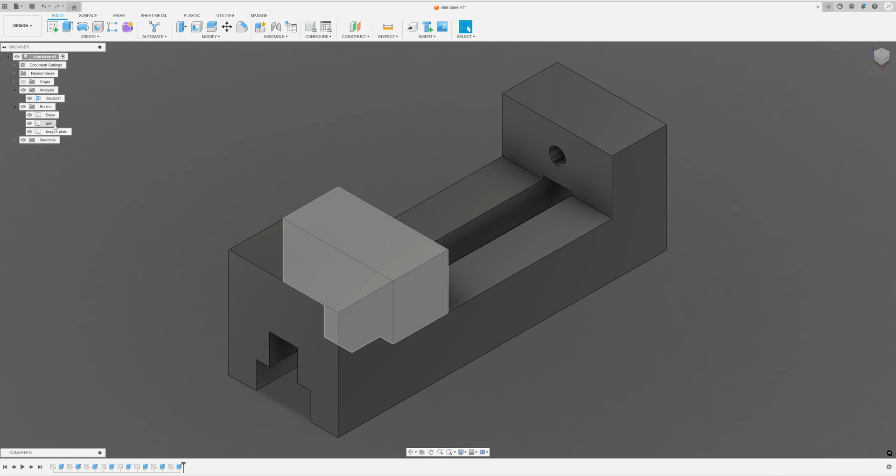So we've got our base, our jaw, and our keeper plate at the bottom. So now what we have left is a second keeper plate on the face here, the rod, which will be threaded, Acme threaded, and a knob. Hopefully we can get that all done in this video.

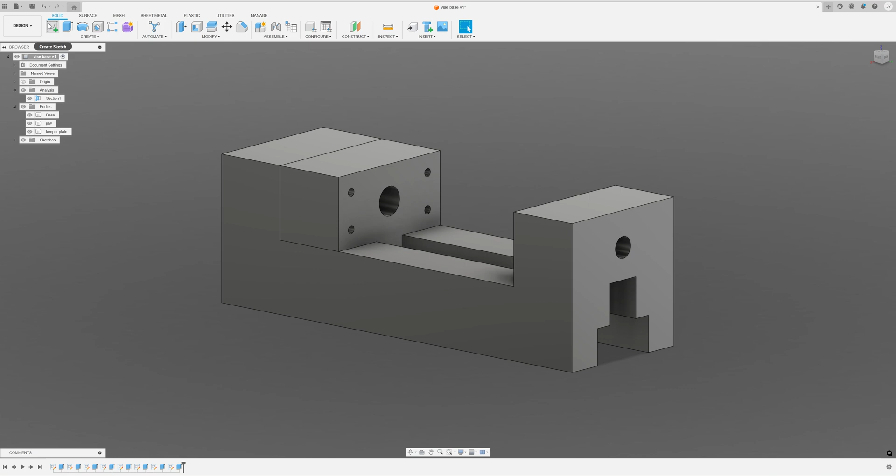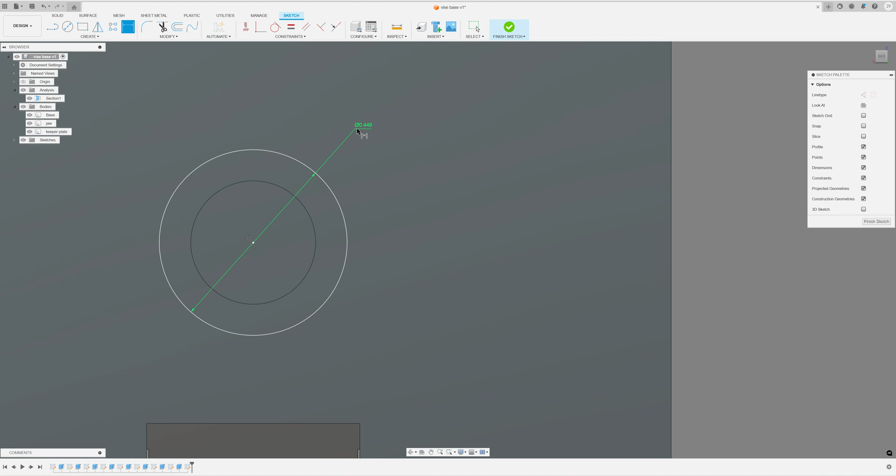So let's start with the rod itself, which will go in there. This will be definitely the easiest part. We're just going to create a sketch right here. Wait for that circle to appear, which means we're concentric. Draw our circle, and it will be 3/8 because we'll be using 3/8 12 Acme thread. So I'm just 0.375. Whoops, accidentally hit enter too soon. 0.375. So that will be our Acme thread.

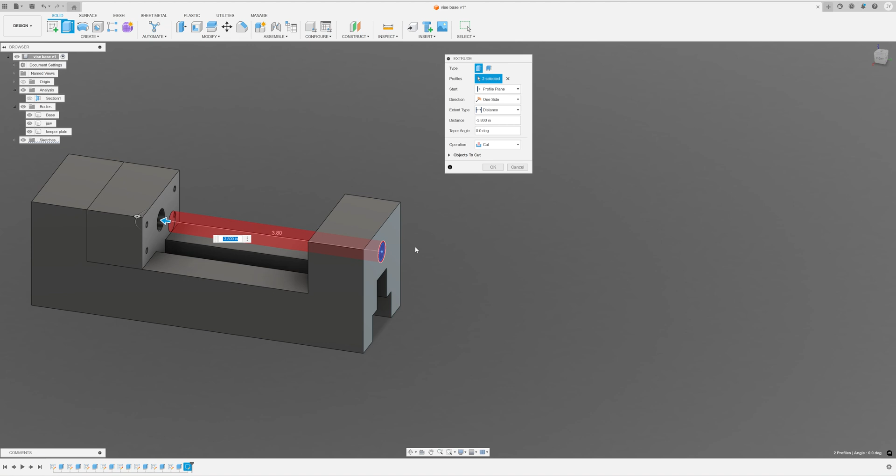E to extrude, select both circles. And we'll start extruding this way. We don't want the sectional analysis on because that's going to get in the way right there. And as we can see, we're taking a cut this direction, but that's not exactly what we want because this is a rod. So we're going to do two sides. Extend this out. We'll extend that out 2 inches. New body, because this will be a new body.

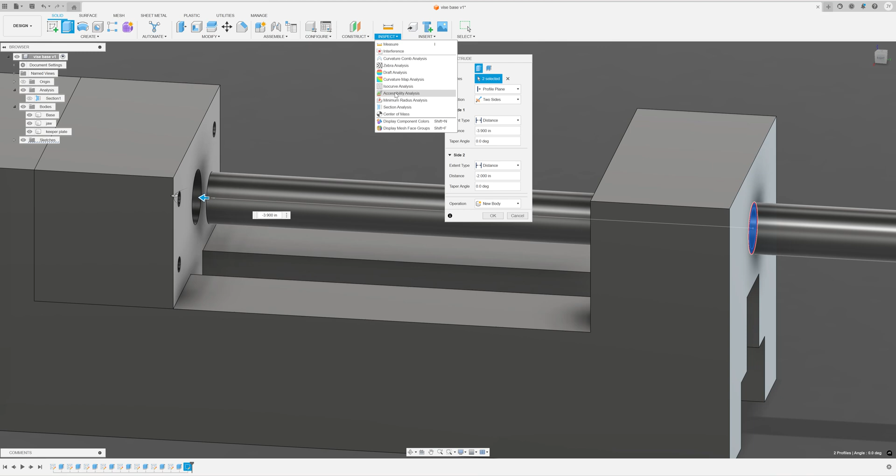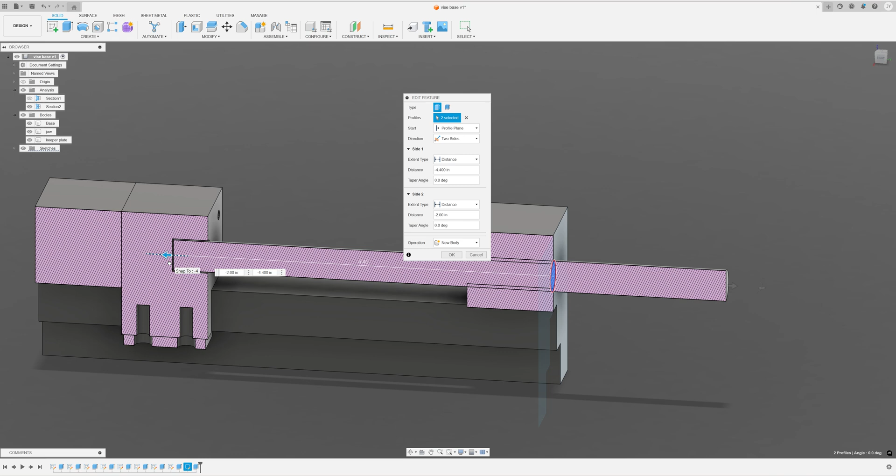And to figure out how far in this way we're extending, it's kind of hard to see. So what we will do is make another sectional analysis. Back up to inspect, drop down, sectional analysis. I'm going to click this face here, move it to 1 inch, which is halfway through. Almost 1 inch, right there, 1 inch. All right, so this, I'm going to edit feature so I can continue dragging this. I don't want to bottom it out because that might cause binding later on.

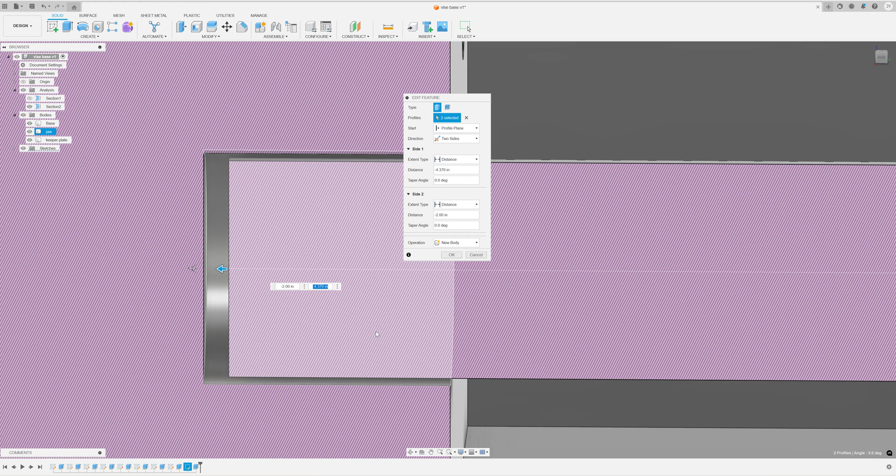Actually, that looks pretty good for clearance wise. But I'm going to bring it back just a little bit. So for this, we're going to go to negative 4.375. Negative 4.375. All right, so that's where we want to be. As we can see, it's going to come out the other side. This is a new body, so we see 2 lines.

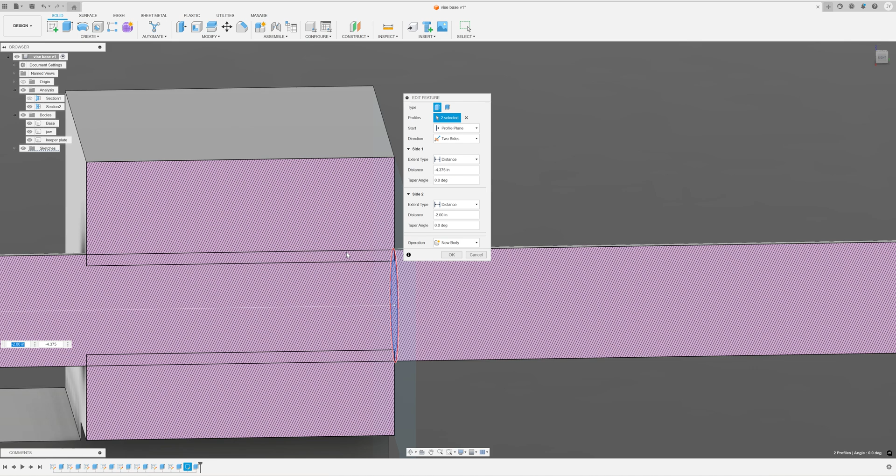The reason they are intersecting each other is because this is going to be threaded. This rod is going to be threaded on the outer diameter, and the hole will be threaded on the inner diameter. This is actually where our thread engagement will be. This can be modeled, but it just takes extra time and effort that really for the drafting process isn't necessary, especially if you're going to be the one machining it. So I'm not going to do anything about that. So that all looks good. Hit OK. That is what we want for that.

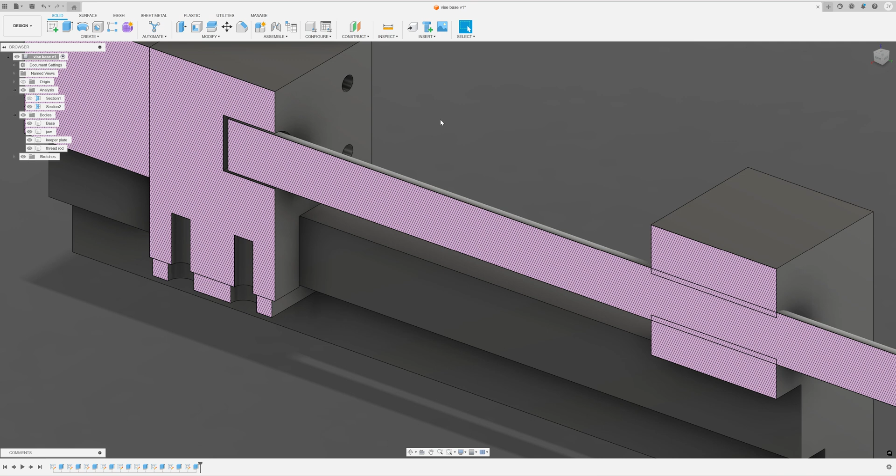So that will be thread rod. Name that so we can keep track of it. And we are done with that. So I'm going to turn my analysis off. This rod isn't completely done. We are going to have a notch in it. So looking at this now, again, I'm just kind of making this up as I go along. I will take a ring out of that section.

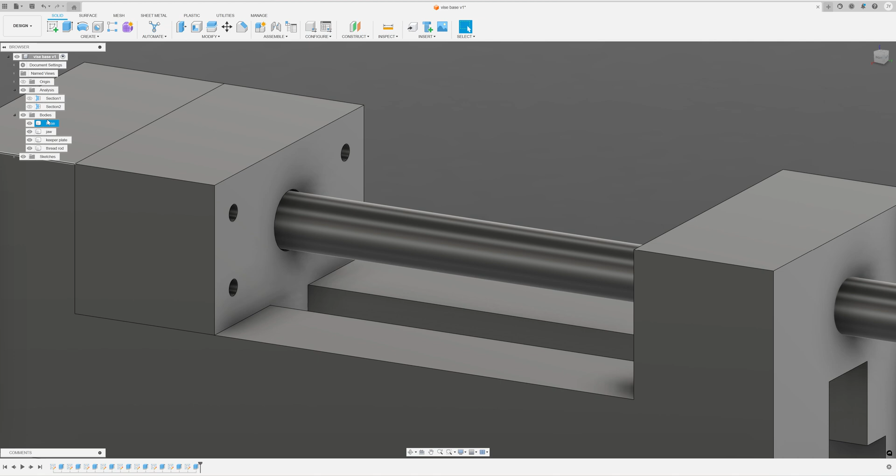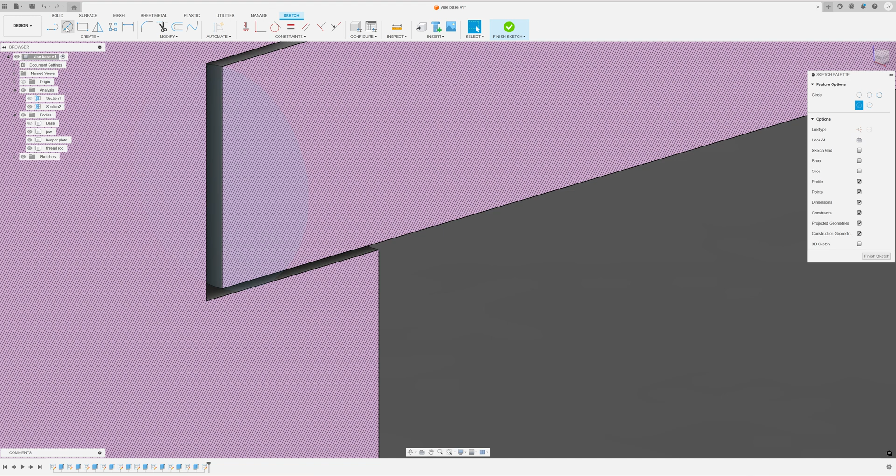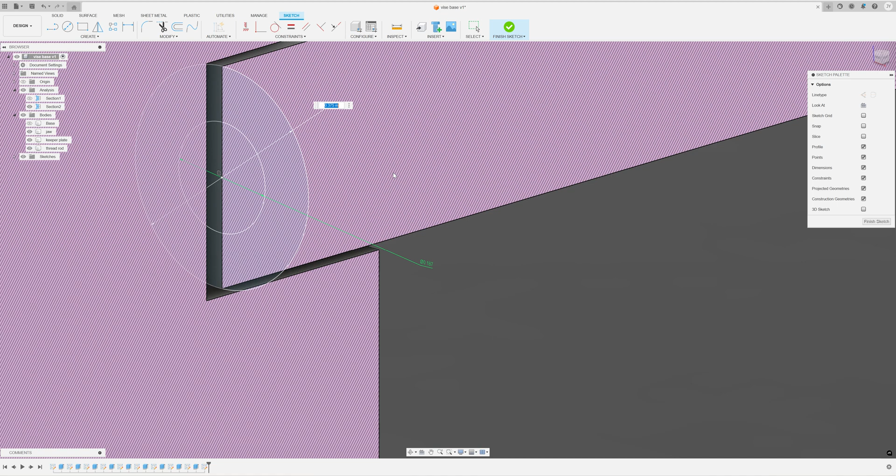So what I will do is turn off our base, which is this one right here, and turn on this sectional analysis so I can kind of see what's going on a little bit better. I am going to do another sketch on this face. It's going to pull me way out of line. So, circle, circle. This will be 0.187. And a second circle formed at 3/8 diameter, 0.375. So I want to make a cut, a groove in this rod.

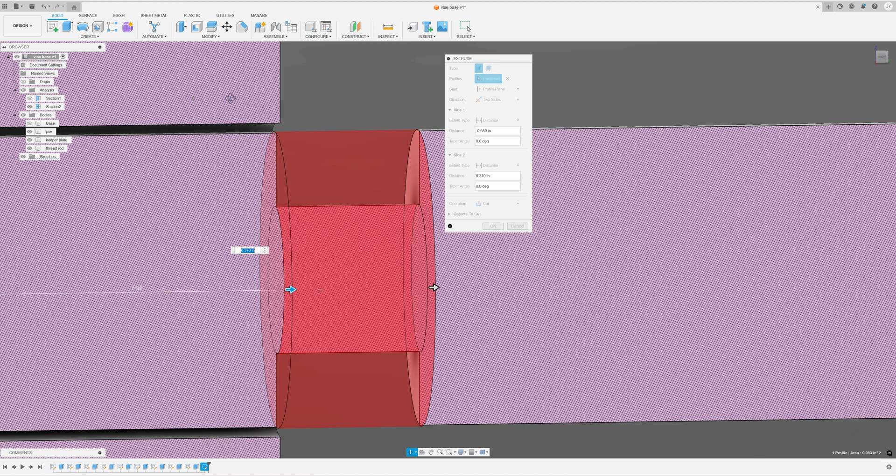There's various ways to do this. This is kind of the quick and dirty way. It works though. So I'm going to hit E to extrude, select that face, pull it back, and I'm going to do two sides. Pull this face up till it's just under that face. So 3/8 would bring me up to that face, so 375. I'm at 370 right now. I'm going to give myself, actually 5 thousandths clearance is pretty good. But I will give myself, actually no, I'm going to stay with 5. 5 is good. All right, so that's 375.

So I'm doing two distances. So the first one's 375. I want this groove to be 135 thousandths wide. So the first one is 375. 135 plus 375 will be negative 3, 4, 5, 505. 375, or 370 plus 1.

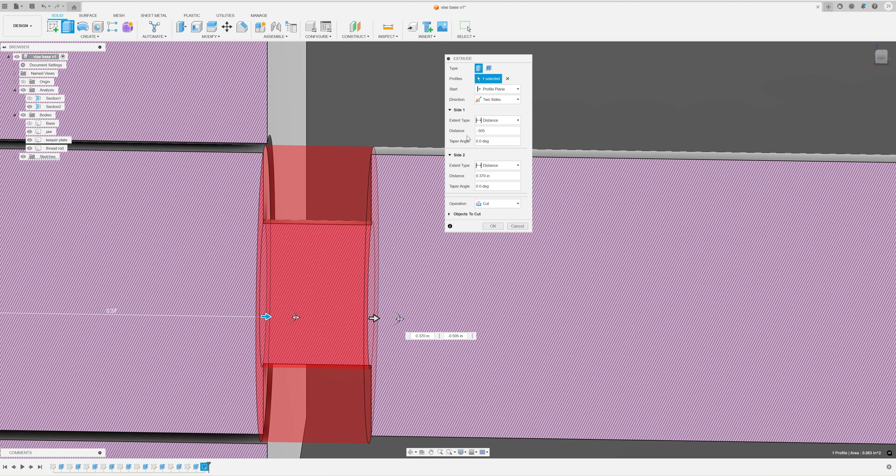Yeah, doing math in my head. Sometimes it's fast, sometimes it's slow. So, yeah, 135, correct. All right, or at least I think so. That will put a ring around this rod in the groove where we want it. So, cut, that's what we want. Okay.

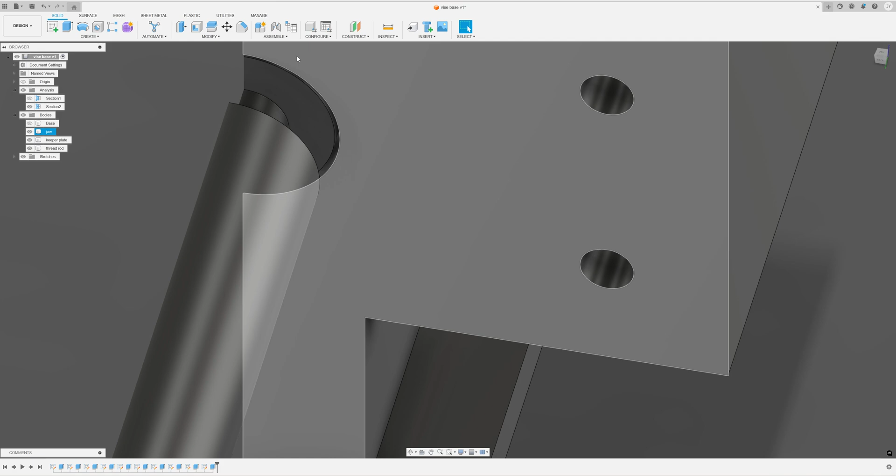So, this has created a groove in our rod, which we can then slide a plate over, which will allow this to then be pulled back when the rod is retracted. So we'll take this sectional analysis off. We can bring our base back, and I'm going to turn the first sectional analysis back on, but I'm going to move it. So what I'm going to do is edit. I want it forward enough now that I can see this reduced section.

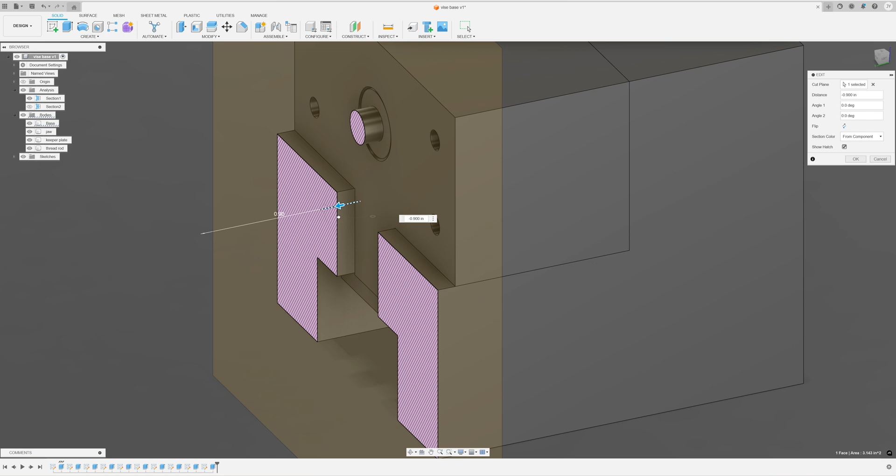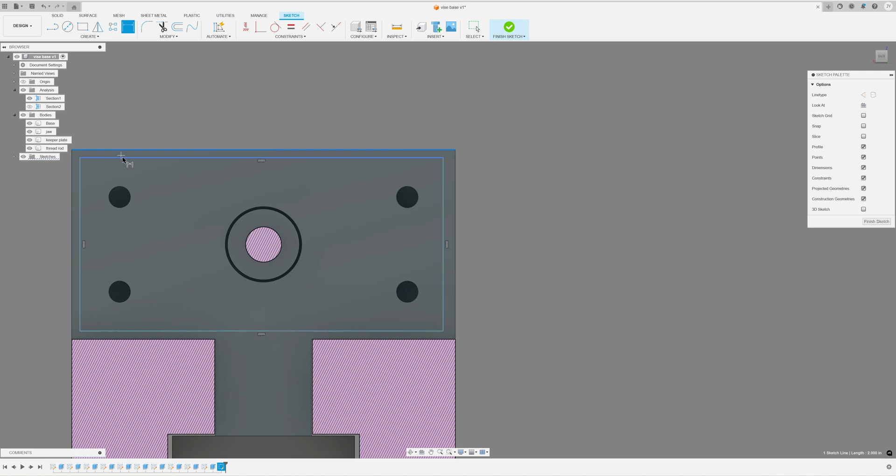All right, now the keeper plate. So we are going to do another sketch on this face. So for the keeper plate, we don't want it rubbing against the bottom of the vise, and we don't want it rubbing against this. So I'm going to start by a 2-point rectangle, and I'm going to draw it across, sketch dimension. I'm going to do 0.05. So give myself 50 thousandths of clearance along all the sides. So that's going to give me clearance.

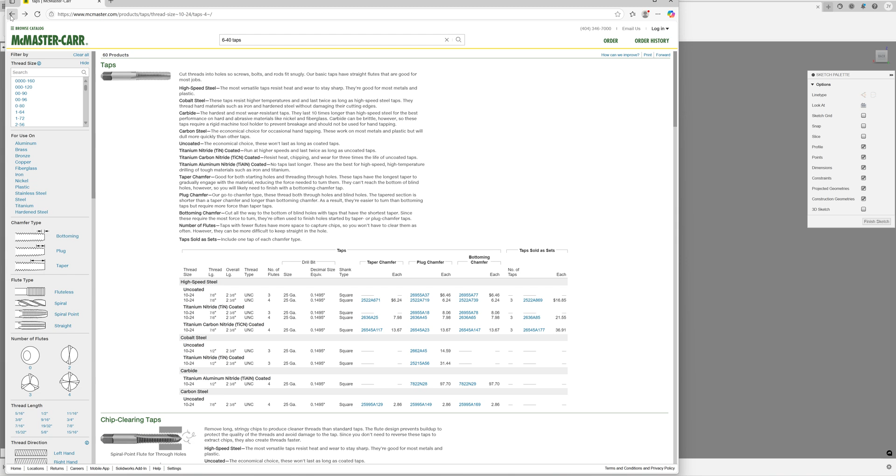Now for the holes, we were going with 6-40. So again, I'm hovering till that circle appears, clicking and dragging. And I'm going to then equals constraint, equal, equal, equal. So now they all equal each other. So I need to know what the clearance over a 6-40 bolt is. I can Google that, or I can just go back to where we were in McMaster.

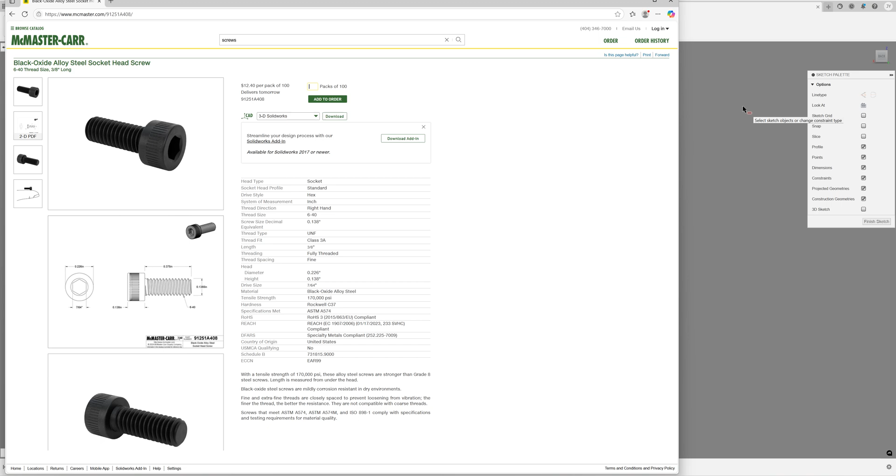6-40, socket head cap screws, and we're going to be going with the 3/8 fine. Product details. Screw size 0.138. So I want to give myself like 10 thousandths over that. 0.148. We'll call it 0.150. And now they're all sized.

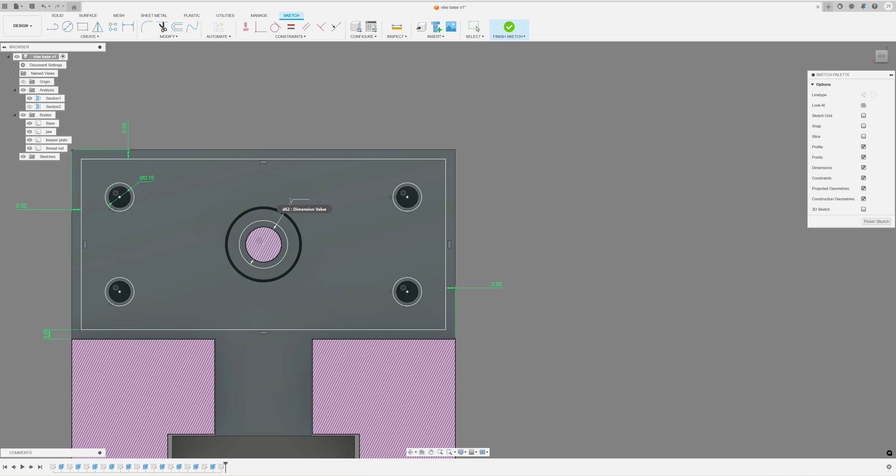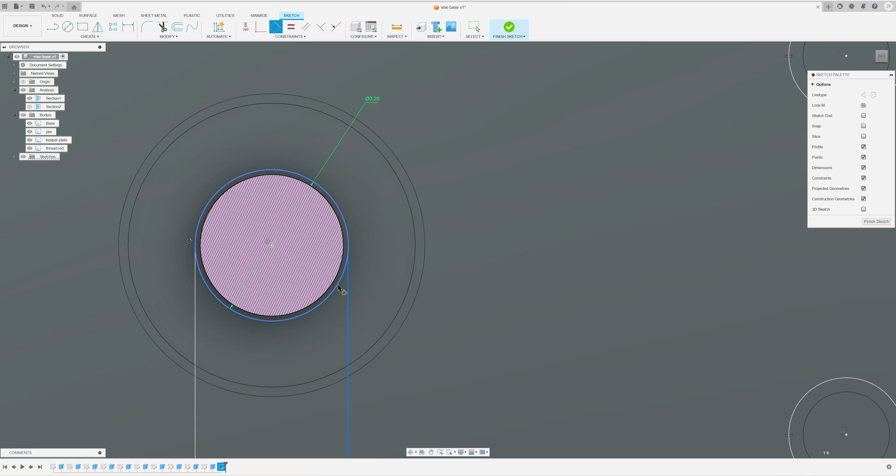Now I also need to make sure I have clearance over here. So for that, what I'm going to do is draw a circle centered on here. Dimension it to 200 thousandths, 0.2 for 200 thousandths. That's going to give me a 64th of clearance over the rod, which should be plenty if we do everything right. Now I'm going to draw two lines down, and then I'm going to make a tangency. So right now they're just kind of hanging there, so I'm going to make them tangent to the circle. And that turned them white. Also, they're square down here. So that is actually the drawing we need.

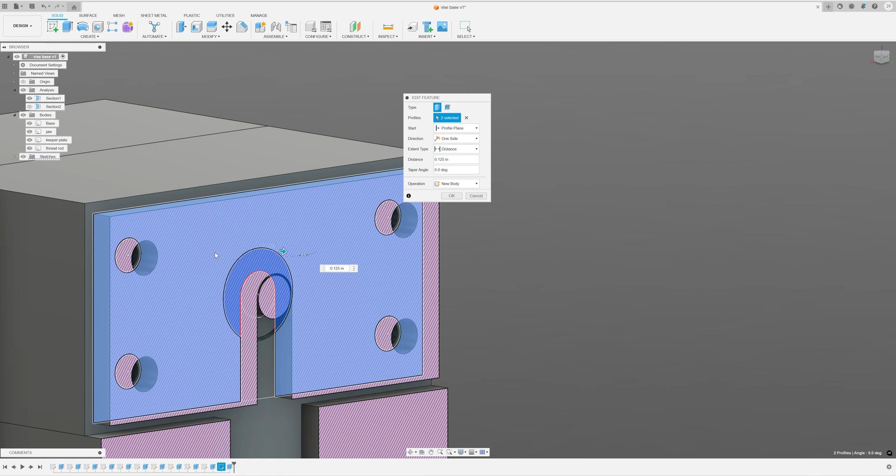Now we're going to hit extrude. Select that and select this. So by not selecting this channel here or that circle, I can now pull that out. We'll make this 0.125. And I always hit enter without thinking all the way through. Edit feature, 0.125. We don't want join. We want new body. So this new body will be our next plate. So we can turn our section off. Whoops, off. Why do I keep... Gosh darn it. There we go.

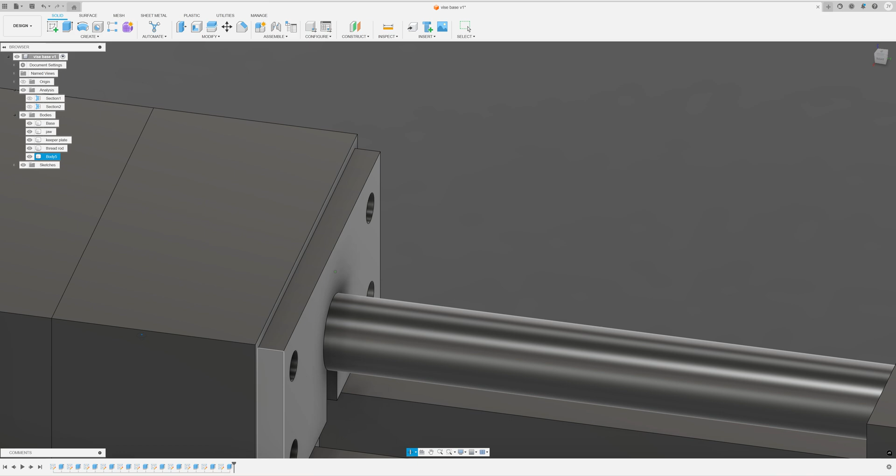So we have a little bit of clearance here, a little bit on the other end. This will also have a groove that fits over, so we can slide this plate in, bolt it in place, and now we will have a plate. When the rod is retracted, we'll pull the jaw back. So that will be jaw plate.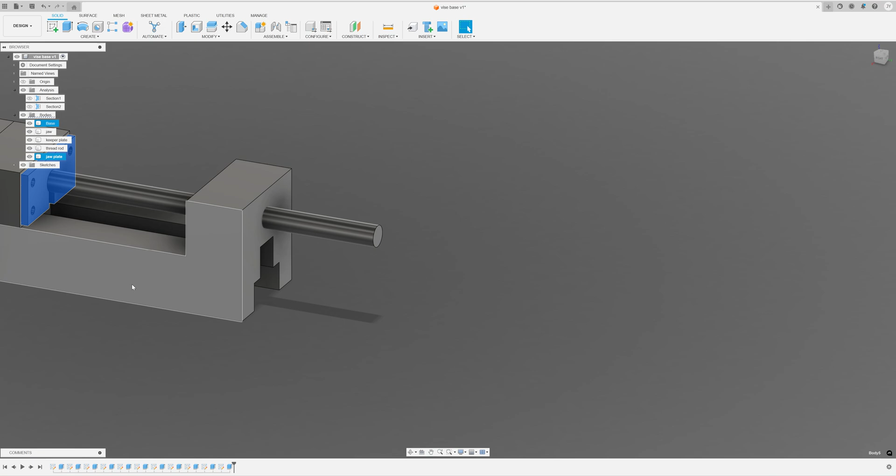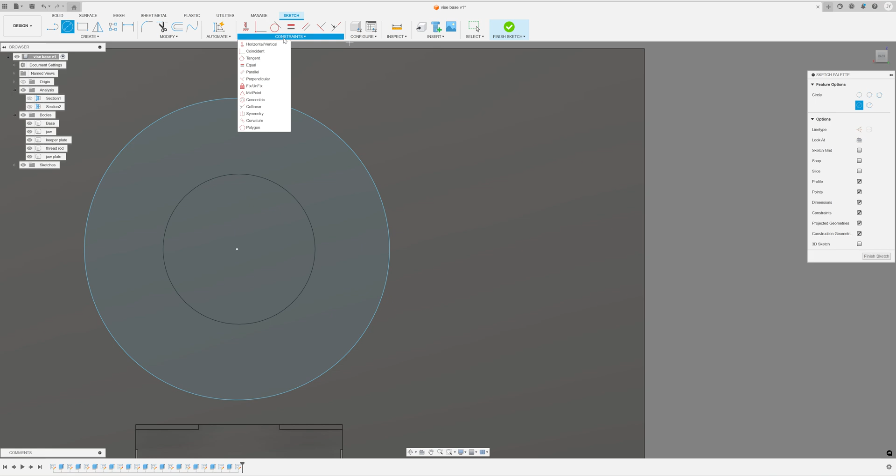All right, so last thing we need is a knob. For the end, create sketch. We'll select the end down here. Circle, because we're going to go with a circular knob. You can make a handle, you can make whatever. So for that time, I actually missed what the center of that circle was, so it didn't auto-constrain. We can always come back here, drop down, concentric, select that circle, select that circle. Now the two circles are concentric.

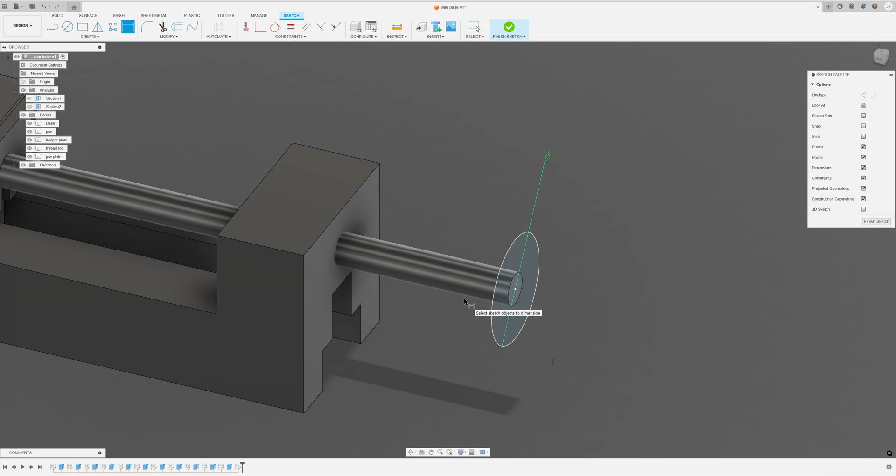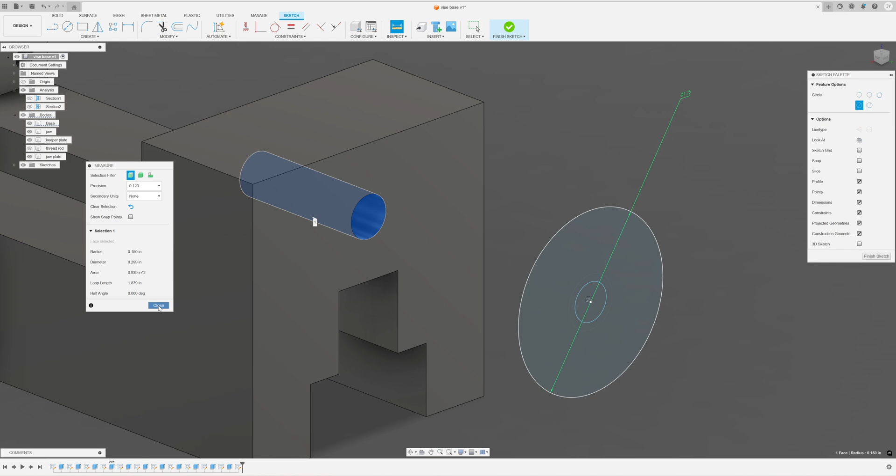Now for the size of the knob, come up, sketch dimension, and we'll go with 1.25, 1.25 knob, and we will bring it 2 inches back. So actually wait, sorry, almost got ahead of myself. We need to do a second circle to the correct thread diameter. So I'm going to make the threaded rod disappear. I can get my dimension here for what our tap drill size is, and I'm looking at a diameter of 0.299, which means when we bring our threaded rod back, I will dimension this at 0.299.

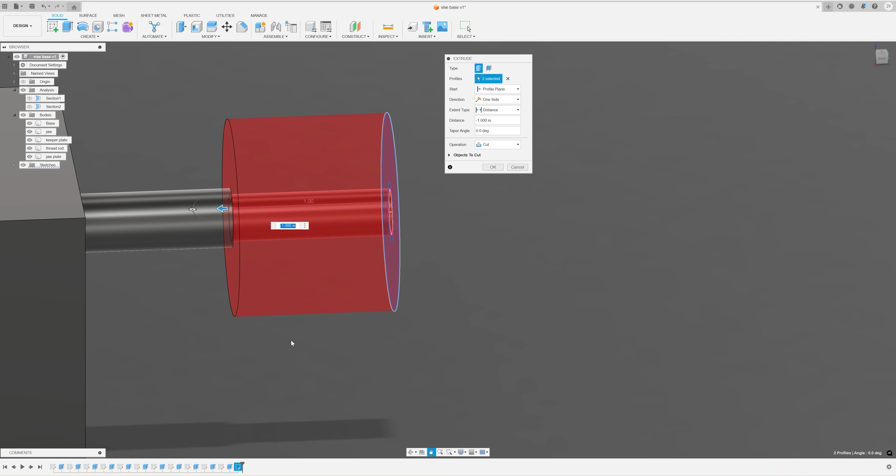Extrude by hitting E, select 2 rings, bring it back to 1 inch. So it's going to want to do a cut, but again, this is going to be a new body. It thinks it's intersecting itself, but we will thread that, so it doesn't matter. Boy, that rod looks a little long. We're going to adjust that.

Yeah. First time I've been accused of my rod being long.

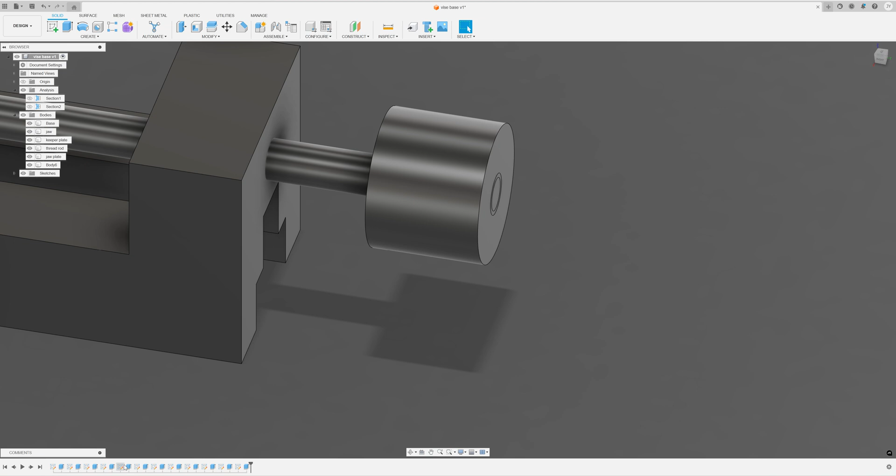All right. New body. Okay. So what I am going to do, though, is page back through this work, and I can find where the extrude for that rod came from. Or I can click it, and it'll highlight it. So it's right here. Edit feature. I'm going to move that back to 1.5. Yeah, that looks better. It gives us less of a moment.

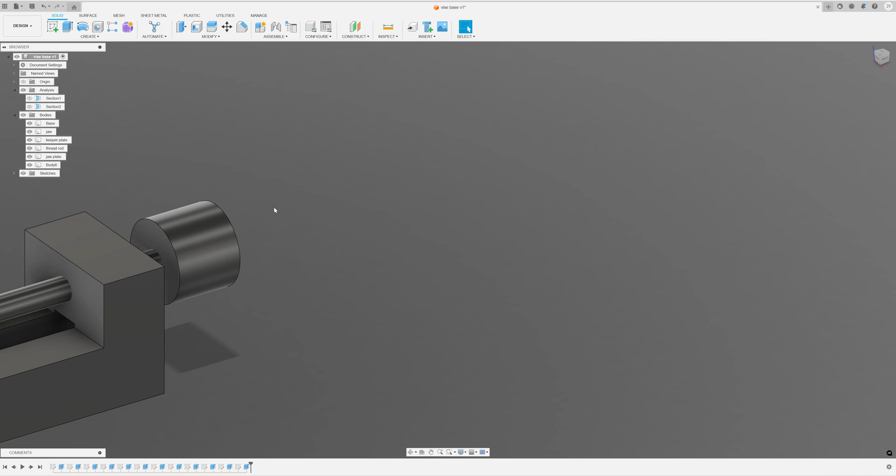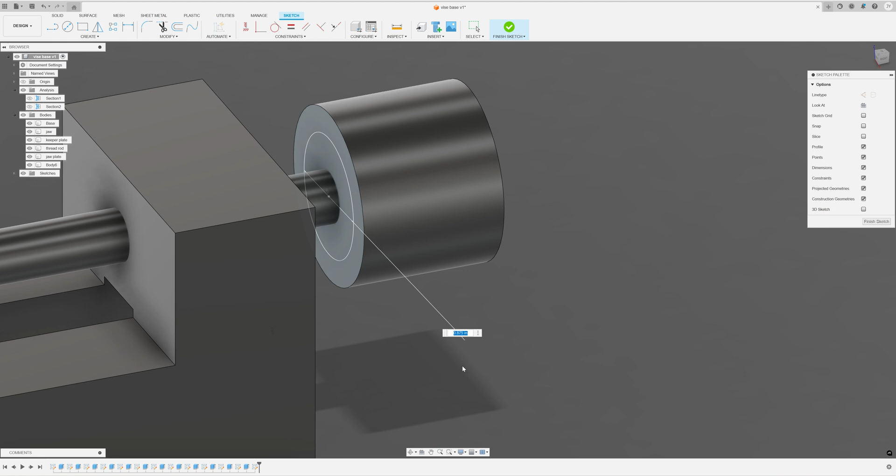All right, so I am going to do another sketch on this face to help reduce that. Now I could do my sectional, bring it all back so I can see what I'm doing, but this is going to be quick and dirty. Circle, circle. We're going to bring that out to 0.875. Yeah, that looks a little big. Again, I'm making this up as I go. 0.75. That looks better. E to extrude. Select this circle. Extrude it back.

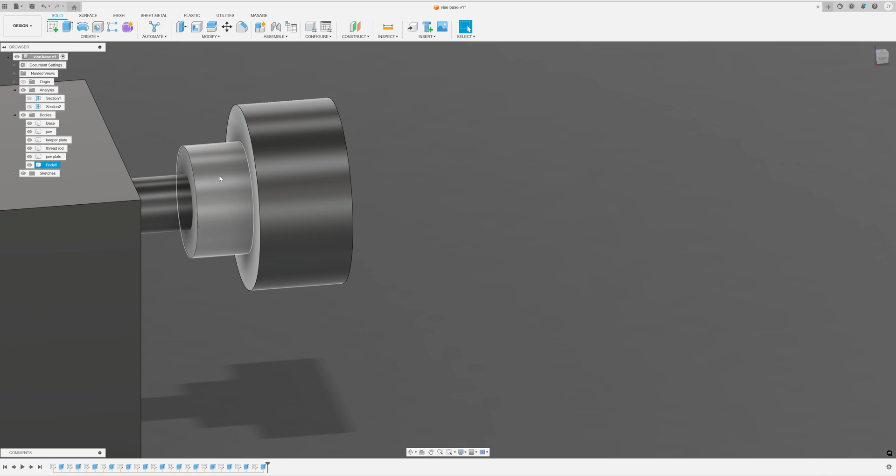We will go back negative 0.375. Enter. So the reason I extruded that back is so that now I can create a hole right here that goes through this rod and that. We can put a roll pin in there to secure them together. So body 6 is knob.

Oh, I love English. It makes so much sense.

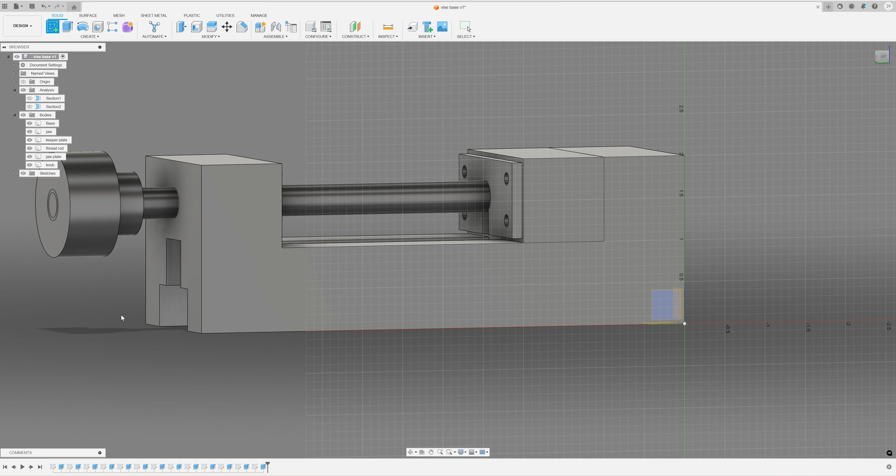All right, so to put a hole on the side of this, it is going to be difficult to select the plane, because if we hit create sketch, it's going to not let me pick a circle because obviously it is not a plane to start on. There are several ways to do this. There's the quick, easy way for doing holes, which I can show you real quick. So we'll hit sketch, and then we will pick the origin plane down here.

Once we pick the origin plane, we're kind of out in the wind. We'll put a circle right here, and we can do a sketch dimension from this face to that circle. 0.375 divided by 2 is a quick, easy way to find center. Since I know that that's 0.375, let's put that on center. 0.125 for a 1/8 through hole, and it still wants it on the y-axis.

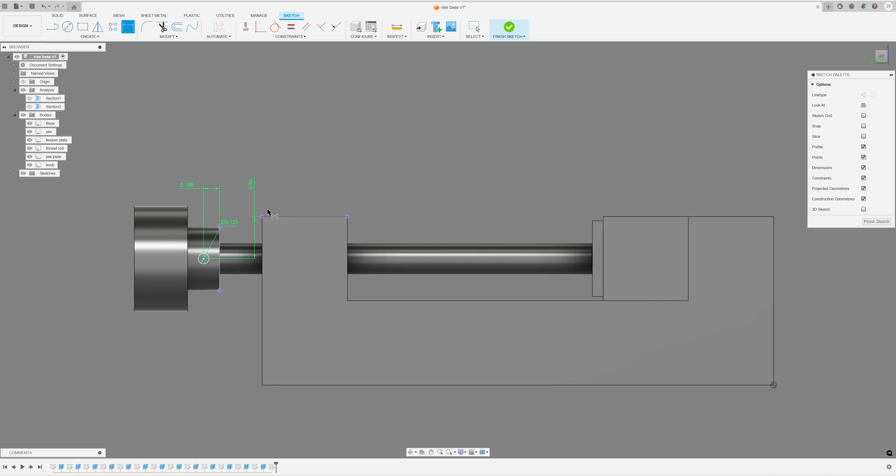So I know from here to the center of this rod is 1/2 inch. So I can extrapolate a 1/2 inch from there, hit E to extrude, and just run a hole all the way through. Maybe not the best way to do it, but it sure works. Yeah, I am going to change that down from a 1/8 hole though, because with a pin that big, it definitely is going to reduce the strength of that 3/8 rod.

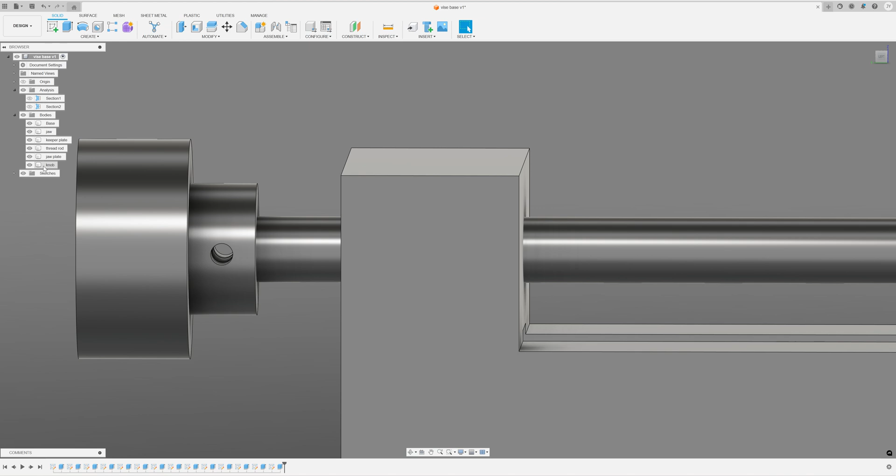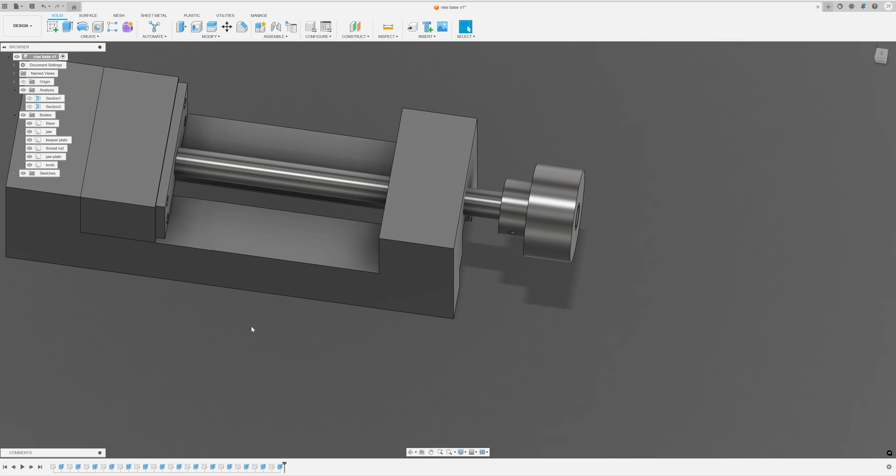So I can go down here, edit feature, bring that down, or sorry, cancel, edit sketch, bring that from 1/8 to 0.087. That looks better. All right, so we can drive a pin through there and secure the handle. That is everything we need to do to design our vise. Obviously, this was a very basic tutorial on how to do things in Fusion.